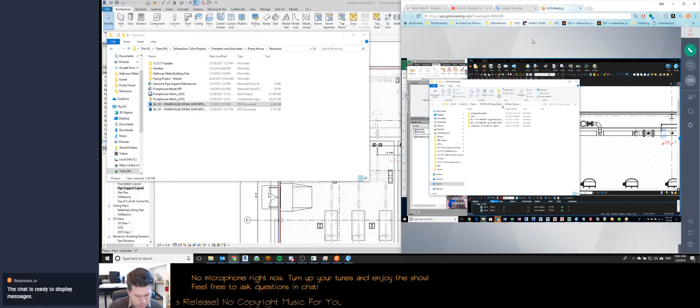But once I have them, I'm going to shoot them to you, and hopefully we can get the rest of the steel in there, support-wise, so we can really give a good idea of how tall all the concrete stanchions are, and finalize some of that. The guy just wants to know how much rebar he needs. I think what I gave him will be okay for the time being, but I'm sure they want as much data as they can get, just like anybody.

Yeah, and some of the heights as specified are off, so either the pipe support is wrong or our pipe height is wrong, or there's just a confusion between the structural and the mechanical engineer. So we'll have to walk through some of it. So yeah, that's what I figured we could do this morning. Before we get into it, Carl, did you get all the drawings I sent last week of the submitted for approval building? Yes, and we've gotten everything except for the main frame done. So we're expecting to have that done today, and then it'll be all off to Tanner.

Sweet. How did it look so far? Was it better? Much better. So obviously we still had some coordination comments, but I've never been happier to say that I was happy to have comments because they were actually good, if there's such a thing as good coordination comments.

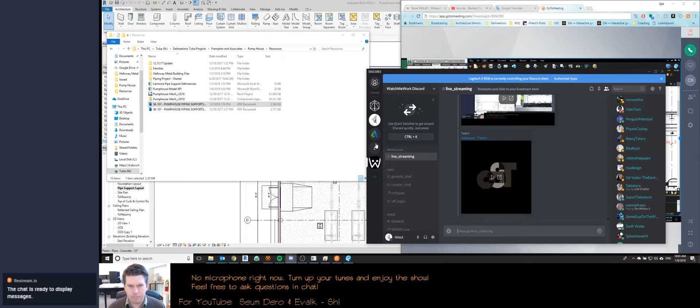All right, well, I guess we can start going through some of these board issues. I have the same drawing pulled up on my screen and Excel spreadsheet, so we can go through them. Excellent. Okay. Well, give me some screen right here. Yeah, do what you need to do with that thing.

Okay, so let's just kind of start at one. So we have supports have potential conflict with adjacent well and drain piping. Support footing continues beyond building foundation. And also, as we look at these, I'd like to review them in the model as well. Okay. We're looking at this guy here. 1-1. I think drain piping, just wherever we set that drain piping will be fine. Drain piping. Yeah, so I think that's good.

At first when I was making up these notes, you and I didn't really talk too much about the drawing. It was like, here it is, and I was looking at it, wondering what the issues actually are. It looked like some of the wells were a little close. And in this particular case, at first I didn't understand what the big blue boxes were, and then I actually used my brain for about 12 seconds and realized that those were the thickened concrete support underneath the foundation.

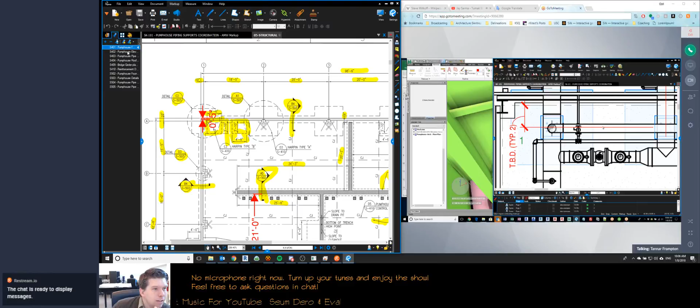So as far as that's the major issue with support, I guess 1 and 2, or both of these are 1. Yeah, these are typical, that they go beyond the building foundation. Right. So looking at the model here, this support is right underneath this T, and I think as long as we're just underneath the T, where we're not on a weld, we're good, right? I would agree. We probably have to be centered on that T in order for the support tube to make sense, and for the welds to have at least a little bit of clearance.

I still don't know how tall the shoes themselves are, still kind of waiting on those. Yeah. But all of that information is going to be subsequent to when we get the submittal data. Real quick, what about this whole tie rod? Is that something that you think... So that's part of the building structure. Are we looking at the model with the new building or no? No, not the update. Carl sent it about 30 seconds before the meeting started.

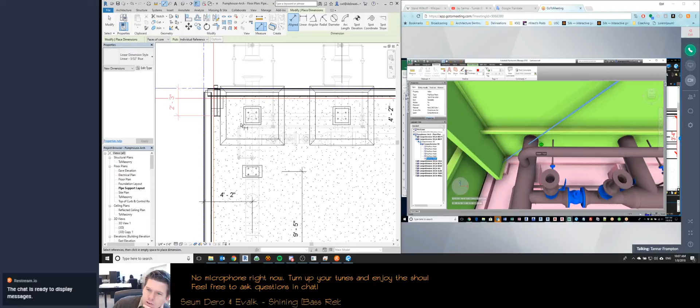Carl, did they include these? This wouldn't be Carl anyway, I don't think. This is the original building manufacturer, so I can't throw him under the bus on this. But yeah, this is the tie rod. Isn't it a tie rod? Is that what it's called, Carl? Yeah, diagonal bracing. It's probably going to be a solid 3/4 inch rod, and it did not change in the latest, so it's still in that same bay. That's what I was going to ask, if it had changed. Nope, sounds like it's still in the same location.

I don't know how far up the column they can raise that diagonal bracing in order to try to miss that pipe. I don't know if it has to be tied down at the base of the column or not. Okay. But that is still an issue with the new model.

So, obviously our options are: one option, from what sounds like Carl, is if this can be raised up on the beam, right, without affecting structural integrity; or relocating the pipe elevation to go down, because we're offsetting here anyway. I don't know if we need to maintain this elevation going out of the building. Or simply just pushing this over probably a good 12 inches, so it's not 18 or 24 inches. So those are kind of the three options that I'm thinking.

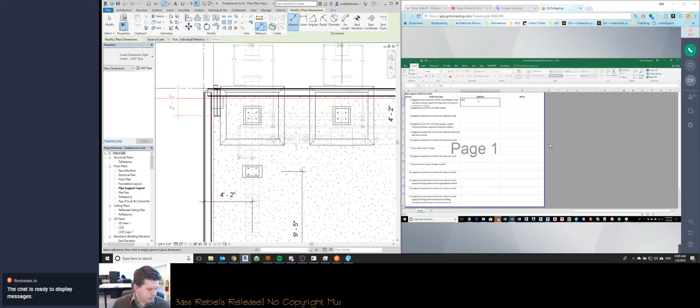So what do you think, Alex? You want to think about it and maybe follow up? Off the top of my head, what I'd like to do is get the new model in here, take a snapshot of this, send this over to Halloway and say, hey, in this area we're having this conflict directly with one of your turnbuckle, whatever they're called, your diagonal bracing, and see what they can come up with. If they can go, oh yeah, we can move that, or just get rid of it. I'd like them to build the building around the piping.

Yeah. First and foremost, this is a pump house. I'd like to mess with the piping layout as little as possible. So if we can get the new building in there that shows everything as they have specified it in the new set of drawings, we can get myself a screenshot, and I can get this over to Brandon. When I talked to Brandon on Thursday or Friday, he seemed perfectly fine with jumping into a meeting with us to go over some of these coordination issues, if there are issues like this.

If we only have this one between the piping and the building, I don't have a problem shooting an email, but what I don't want to do is stack up 15 emails in his inbox for similar issues. We could do some sort of RFI, or kind of what we're doing here, where we just walk through these and see what he can and can't do. But if we don't have too many of these occurrences, I don't have a problem. If you guys want to shoot me a screenshot of what's going on here, I'll get to Brandon and see what he can do. Like I said, I'd rather us get him to manipulate this cross brace or do something with it to get it out of the way.

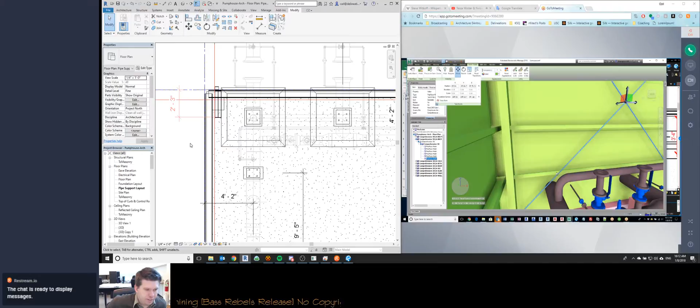Okay. And now that's not me redoing the angle, I'm just moving the whole thing up. So, yeah, you're right. It's probably going to be more like 10 inches or a foot, because if you look at the top, the top of that bracing needs to still be within the column. So that's going to lower that angle a little bit.

Carl, is there any reason why this diagonal bracing wasn't in the original set of drawings, the contract drawings? No, but the structural wouldn't have done any engineering for the building, so they wouldn't know where the building manufacturer would want to put that bracing. The bracing's gonna have to go in one of the end bays. So it was either this bay or the bay where the control room is, and that bay has those openings down there, so this was the clearer choice. I have a feeling they'll be able to raise those up, but I don't know what the limitation is.

So I will also say, Tanner, this model, the one that we're looking at, even though it's not updated to the latest drawings,

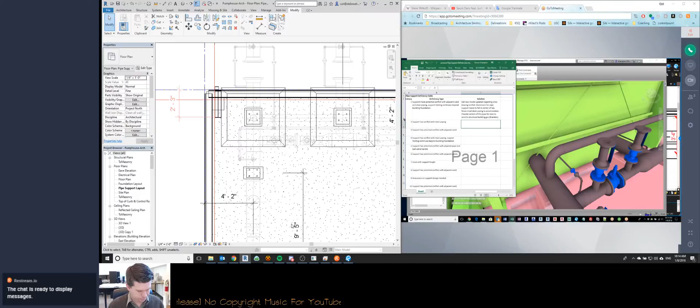How's that? And it sounds like, as far as the foundations are concerned, for these two, I'm looking at the piping, and I think in order to get this piece of pipe out of the way, it looks like we'd have to make some... We don't have a very long run between that T that the support sits under and the wall itself to make some sort of transition, at least a nice transition.

So if we lowered this whole leg of the pipe, we're affecting quite a bit of the pipe at that point. We're affecting not only this leg, but also this other leg. I mean, I guess you could do that, what you're showing there. Yeah. Yeah, you have a U further down. So further south, if you keep coming down that branch there, you've got another transition that you have to worry about. But it looks like you could push that in also. Yeah, you could squeeze that in.

We shortened it up right here. Go back to the area that we're looking at though. That I'm not too worried about. What I am worried about, that's getting a little tight. All those valves and everything. Yeah, I'm worried about access to all the valves. It doesn't look like it would be that big of a deal to squeeze it in a little bit to get it to fit. But let's go first with the first option of let's talk to Brandon and see what options we have on the building side. They may be able to do something to move that bracing to a different bay.

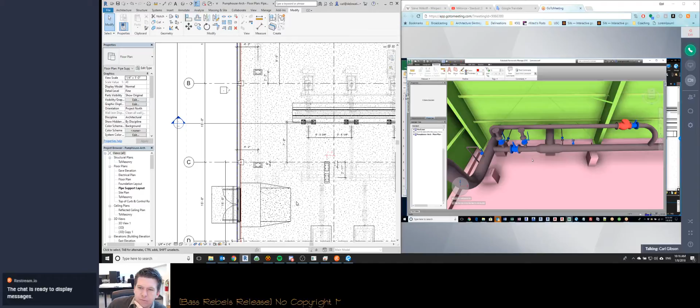Okay. So I think just letting them know, hey, just send them a picture, and I bet they'll find a good solution. Yeah, I'm going to send a screenshot and a section with dimensions to show where it's at. Okay. And Carl, well, you may not know the answer to this. I know you're still kind of modeling stuff. Do the main beams, columns in that building overhang? Are they going to overhang as much as we're seeing in this model? They still overhang. Some of them are a little bit smaller, but they do still overhang. And there's even a note in the drawings talking about them overhanging. So yeah, we're gonna have to look at that quite a bit to see where they're interfering once you've got all that sorted out.

Because Brandon said they could taper them, but then they had to do something with the upper roof columns that was going to interfere with the gantry system or something like that. Yeah, I didn't understand what the response was. It sounded like option A or B. But basically, it sounded like you have to have the same amount of cross area in the whole system to be as strong as they need it. So if you lessen the area at the bottom to fit on the column, if you taper the bottom, make it smaller, then up there at the knee, where the rafter and the column meet, that's going to get beefier.

And so what's going to happen is that rafter is probably going to drop down a little bit to get deeper from the roof down below. And that will affect how much clearance the gantry has on that side for the support beam. We don't have the gantry in here, do we? It doesn't look like it's in this model, but did you turn off the structure for the architectural? I think you turned off the columns from the architectural, which has the support beams in there. So I don't know that I'd worry about it. Well, let's not get off of pipe supports this early.

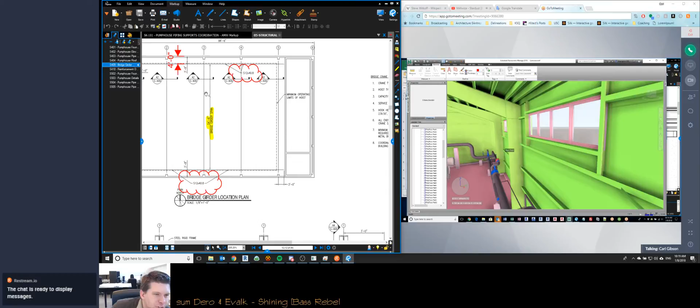I meant to go back and look at the elevations that they gave us for the bridge crane, and I don't think Structure ever gave us heights for those. So the height of that bridge crane is being set by the building manufacturer anyway. Gotcha. I'm looking to verify that, but I'll let you know if I find anything. Might be an architectural. Well, maybe that's something we go back to AV&A and say, hey, what's the height of this bridge crane supposed to be? Yeah, I'm looking to see, maybe I missed something.

Okay. Hey, so Tanner, on number one, can you tell me dimensionally how much those support foundations are kind of overhanging the building foundations? Make sense what I'm asking? You're talking about the foundations. Yeah, so you're talking about like this overhang there? Yeah, I guess how extensive that overhang is, because I'm gonna generate an RFI for today.

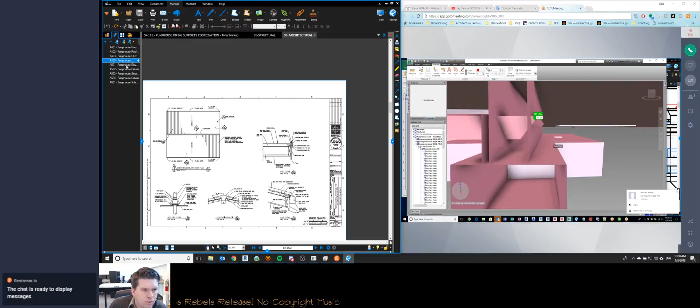I think there's these two, and there's 2 or 3 other supports that are overhanging the main foundation by some way, shape, or form, and I'd like to be able to tell them how much that is. I'd get at 2 inches. Is that right, Carl? Yeah, I think the bigger concern here is if that foundation is somehow being tied in, so I would actually say it's 10 inches, because you want to go to the inside face of that foundation.

You don't want that rebar. Yeah, you don't want the rebar for this foundation being mixed in with the building rebar. Those need to be 2 separate structures. I gotcha. So 10, okay. So anything past the inside edge is overhang. Yes, and I say that it needs to be separate structures in my non-engineering professional opinion. I'm going to concur with Carl's non-engineering professional opinion.

They're going to want to keep all the steel and all that stuff tied into the main foundation, and they're not going to want any overhang. A foundation with nothing going beyond the boundaries, and then they drop the building on it. Alex, are you with the company that's going to be subcontracting the steel men and the concrete pourers? Yeah. Okay, so I guarantee you, if you talk to your subcontractors, they're going to look at this and say, we don't want that separate.

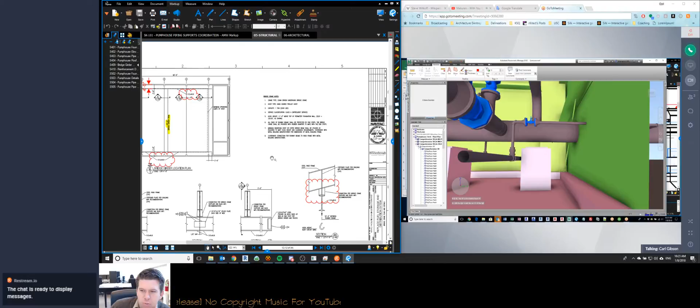And what I wasn't sure about is, sometimes with these pre-engineered buildings, they'll do the perimeter wall and the strip footing all the way around the exterior with a column base, and leave the interior completely dirt. Then they'll come back and pour the slab later with the building already erected. So I wasn't sure if that was going to be one of those processes. That has not been discussed with me. I don't think that's how they're doing it.

I think they're going to lay down the whole concrete foundation for this building, and then build a building on top. They're going to dig and cage everything, and then come back and pour it, basically? Correct. They're going to form everything, get all the wood in place, and then do it all at one time in multiple pours. They're going to tie in all the steel all at once. That's what's been communicated to me, that they're going to do this all in one big exercise.

Yeah, and just to update you guys, I'm looking through the architectural and structural, and there's no mention of any elevations except for the hook height, talking about the bridge crane. So there's nothing in the architectural or structural that is setting the height for those supports. Okay. What sheet are you on? Yes.

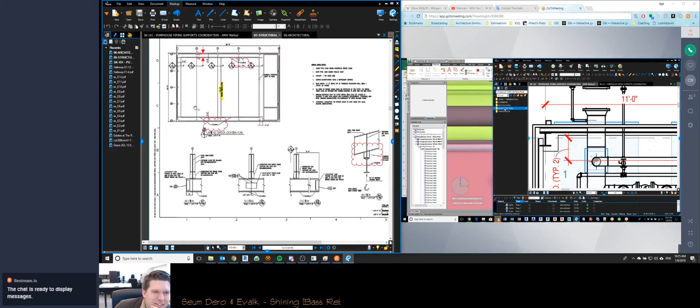Oh, what sheet were you on? I'm on all the sheets. I mean, do you want me to tell you which sheet doesn't have a height for the crane, or just the ones that I'm looking at? Oh, well, the way you said something. Height. Yeah, there isn't one, so I don't know which sheet you want me to give you. Oh, I thought you said there was one. No. Oh, I'm sorry.

For the hook height, that's S409. S or F? S as in structural. Oh, okay, cool. Or Sierra if you're in the military.

54.6. Oh wait, no, that's between. It says 239 minimum, and I'm looking again in the architectural. There is one mention in the architectural that the hook height is 11 foot 6 inches above the top of the foundation. I'm looking for that number right now because I just saw it. Above perimeter foundation wall. Okay, there it is. 11.6. Yep.

Tanner, have you modeled the gantry crane in here? I remember it kind of was, wasn't it? We've got the crane rails, but just so you know, Tanner, that third purlin up is 11'6". There you go. That's kind of a low crane. Well, that's a good thing for us. Well, that's the minimum height too, so it should be able to be raised up above that. I mean, if we went with

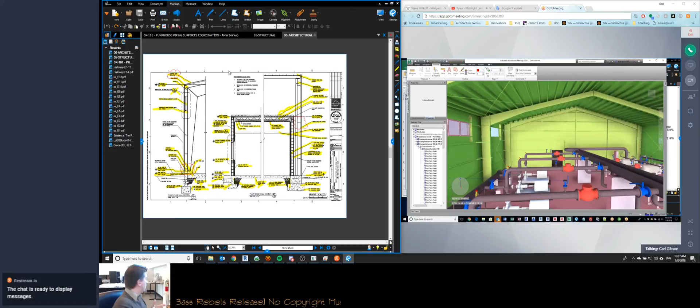Courtney, you're welcome to come listen in on this meeting if you want to kind of see how it goes.

So, Carl, correct me if I'm wrong, but Holloway is worried about the actual gantry rail with the roof rafter. Right. What they're concerned about is if that rafter gets thicker, it's going to lower the supports. I was looking here. They have some specifications in Holloway's documents on the cover sheets on the crane. Sorry, it is on the cover sheet. On the cover sheet of the Holloway E sheets, they have some information on a crane, but nothing indicating sizes or anything like that.

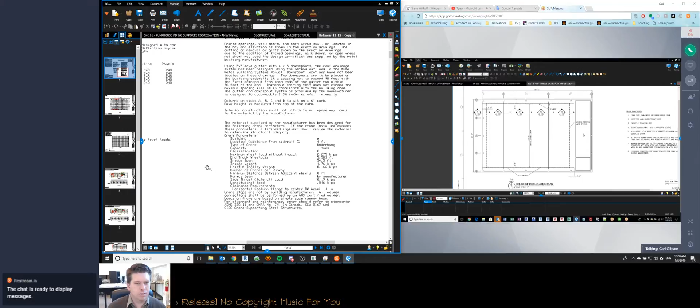So basically, what Holloway is concerned about is if that rafter gets deeper, the supports get lower. And I think you're going to have to start getting some model numbers for the crane to figure out how that works with the hook height. Does that make sense? I can do that. Put that on my list. Basically, you're gonna want a number from the crane manufacturer on the minimum distance between the bottom of the hook and the supports that the crane sits on, because there are no details on how that really sits in any of the documents. Okay.

Is it smart for us to model the kind of crane system in here? Yeah. Okay, then I need to find a cut sheet on this crane that we're gonna throw in here, don't I? I think Tanner just wants to model something. No, so there's two parts to it, Alex. There's modeling the crane itself, and then there's modeling an operation zone. Those two things are actually very important.

If we're going to the extent that we're going, to leave that out is pretty critical in my book. But at the same time, it is something that is overhead, and I understand that once you get up above the absolute highest, tallest piece of the piping system, then you're clear, but still, you never know until you model it in. You know what I mean? Yep. I'll get whatever.

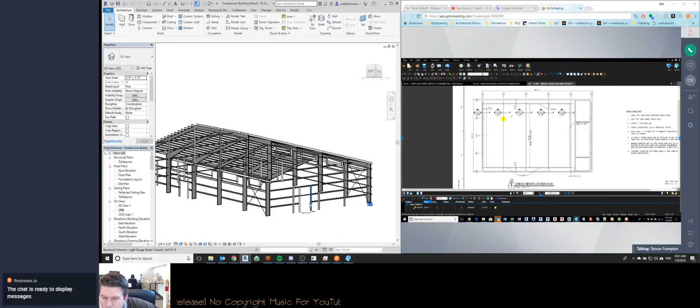Because think of this: when you model in the operational path of travel and things like that, if you reference the PDF, here's the girders, right? You may find a spot where something the crane needs to pick up would be dead center, say right here, and the crane would be like 6 inches or a foot out of range to come down and pick something up. I'm just throwing out something generally. You can really plan ahead to make sure that every component is truly in place at the path of the crane itself, and nothing is missed.

Okay. Well, then let me start. I don't even know who's supplying that thing, or if we are even supplying it. I'll have to do some digging on that. This could be one of those things the government likes to do a lot, where they just want us to put in the infrastructure, and then they have some maintenance supplier that supplies the crane.

Yep, if that makes sense to you guys. Sometimes they just want us to, like, on a lot of the tank work we do, if we're repairing a tank, they want us to go in there, repair the tank, and add a couple of nozzles. And they'll have their maintenance people come in and actually put the purchased equipment on top of these nozzles.

Yeah, no, I know exactly what you mean. My guess is we are supplying this crane, but off the top of my head, I have no idea who's been subcontracted to supply the crane, or what the crane is, or anything like that. So let me do some digging on that. Okay, cool.

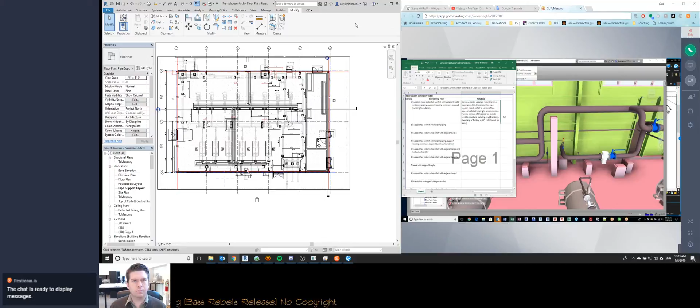Because, like I said, I'm going to craft an RFI up today that identifies all these supports that overhang the foundation, but I'd like to have dimensions in there so I can call it out, give an attachment that says, hey, this is an issue, what do you guys want us to do? Okay, got it. Sweet.

So move on to number two. In the middle of the building here, conflict with drain piping. Alex, kind of like what you mentioned, you were just going off the plan view. This may be a false positive. So what is the issue with two? We were looking at possible drain piping, but this is a double stack pipe, so it's a false positive there. There's no drain piping issue that I can see. There's just the little bypass here.

It doesn't look to me like we'll have any weld clearance issues or anything like that either. Right, I think we're good. So I think we can mark off two. And it looks like we have enough room laterally where we could move it if we wanted to. Can you go back to the 3D real quick? Is that the right location? Oh, that's under. Okay, now I follow.

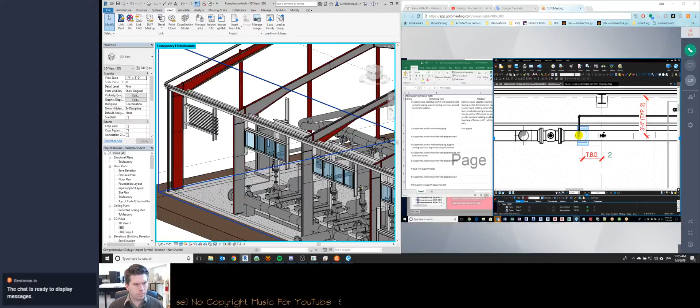Yeah, the initial plan view you sent is a little deceiving because you can't see the bottom. So I think we're fine on that regardless. We can move it, in that view, to the left if we need to, in order to get away from that reducer. Right.

Okay, three. To be determined, and this is building. Let's just continue down the line. We're looking at 3 now. So what's the issue with 3? Are we close to a weld, or is this another area where there's a pipe underneath here that I can't see? Let me look at this for a second. So small. Okay. Is 3 the big tall one? Yeah.

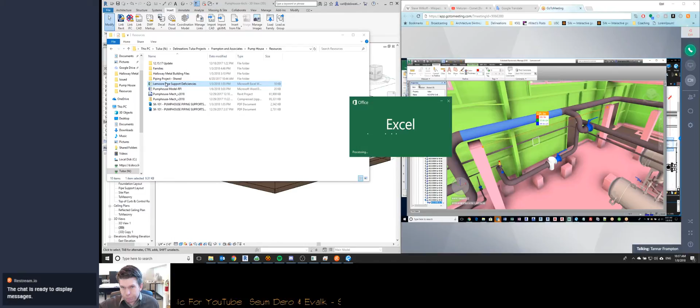Now, let me ask this question. 22-foot span. Is that too long of a span by chance? What size is that pipe? It doesn't tell me. And what's the span? You say it's 22 feet, 5 inches? It's 10 inch, we're assuming?

10 inch pipe, yeah. So, just for your edification, Schedule 40, which I think all this piping is, just plain Jane steel pipe. You start to worry at a 40-foot span for 10-inch pipe. We're good. I've got a little table right here that I use, kind of an offhand table, and I'm seeing it go up to 40 feet if you wanted to.

Now, the government would never let a span that big happen. But I think at 20 feet you're fine. Is that what your concern was? No, that was kind of sidebar, but I think we're good now that we looked at it. So Tanner, the way I was reading that, if you look back to the left there, I think you'll see that it's close to a weld point.

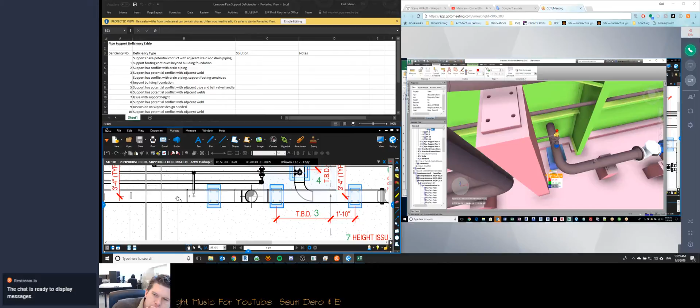How much space do we have between that support and whatever's down at the bottom there? One here. Is there anything? Is there any reason why we couldn't move it to the right a little bit? Maybe a couple inches. If we just go delta, we're looking at 6 inches. Yeah, but I don't see any reason why we couldn't move it if we wanted to.

Couldn't move it maybe an inch or two to the, I guess, to the right would give it a little bit more. I think we're fine with that one. Let's leave as is. Hey Tanner. Yeah. Look at that just real quick.

I'm looking at the foundation situation there for the big square one. Oh yeah, I see. Let me just look at that real quick. Oh yeah, does that interfere with this big tall one? Well, that number, the one that's number 4, is another one that I think is sticking outside of the foundation there. Correct. And I guess 4, that's what I'm looking at real quick. I think that is a PS3. That's pipe support L.

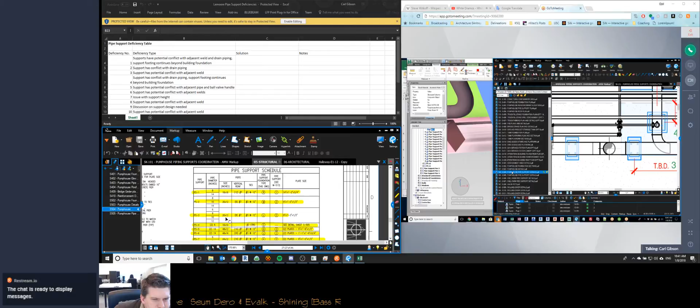And so that just has some hooks going into the slab. But it doesn't indicate how far out those hooks go. So if you look at S504, it's probably mentioned somewhere, but I don't see it. Plate size, ties, vertical reinforcements. Type support foundation type. So drawing L, type L.

So you see the rebar hooks going out there. So I don't know what that clearance is. And then if you go to the next sheet, S505, you'll see what the rebar looks like for that guy. And you'll see that we might actually have a problem currently with the rebar. It's down underneath. It's type R. You scroll down some. Oh, type R, here we go. Yep. So we might have a rebar collision there between those two.

I'm trying to visualize how that would look. So if you go back to Navis, and you imagine the cage coming up from that foundation. Go look at it from the south. Does that sit over? It does.

Okay. You might want to put a note if you go back to your PDF or your plan view where Alex put his markups on it. You see where that sits inside of the foundation area. You see how the tall support sits inside the area of the foundation. Yeah. You might have a collision with some rebar right there.

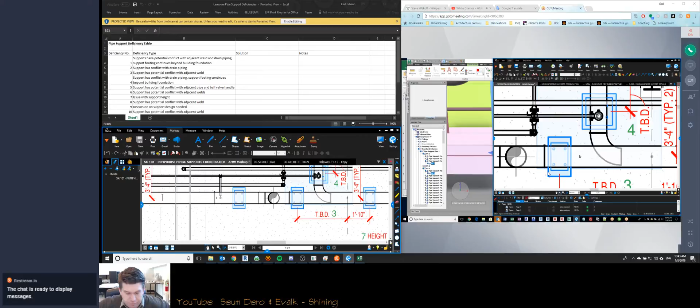My guess is they're going to rework this thing too. Yeah, probably. And Alex, you can just let us know if it's a field work thing where they just work around it. I don't know. Again, I would think that they're just going to jam all that steel in there. Yeah, probably. If steel's kind of touching steel, it's all going to be encased in concrete. None of this is going to ever go anywhere.

Right. So I don't know what the limitations are for what they can move and what they have to have exactly where it's shown in the structural document. So this is just me looking at this saying, if it's sitting on top of another foundation, they might have to work around some rebar there. And that maybe is just a note we put in there. When we were talking about moving it closer, I was thinking that might complicate things a little bit more. But again, it's probably something that somebody with experience in the field can do no problem.

Yeah, I don't think the concrete people are going to have any problem working. I'm sure there's got to be a couple more conflicts like this too, where there might be one support sitting on another support's footing. I'm assuming this is probably not the only case of this. We just highlighted this case because this foundation in particular is overhanging the overall foundation. I just took a quick glance around. I think this is the only place where one pipe support's sitting over the foundation of another pipe support. Oh, really? Yeah. Okay.

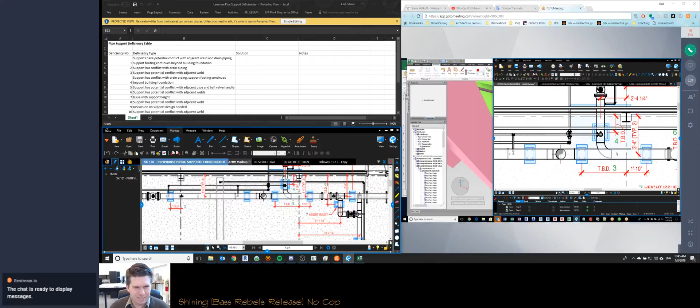Yeah. Okay. Well, my guess is what I can do is I can call that out. What I'll first do is I'll first talk to ABNA and go, hey, your foundation's overhanging, and they'll go, oh, then chop this edge off a little bit, right, thicken it here, or do whatever. And then at that point, we'll send those drawings back to our concrete guy and go, hey, are you guys going to have any problems with the rebar meshing up in these areas? We'll highlight the area, see if they're going to have some issues, and go from there. Right.

Let me jump in real quick. I got about 15 minutes to go before I got to move on to another meeting, so I just want to consider the time there. Jesus Christ, man. You're the one who booked this meeting, too. I mean, there's so many things to consider. I get it, trust me.

Okay, so for four, call out the same dimensions. That number 4 is overhanging, whatever it is. I guess it's probably around the same amount. Yeah, it's the same foundation. It's hanging the same amount there. Yeah, it's going to be the exact same. Call that out on the little sheet, otherwise I'll forget. Or it's about a foot or something. Yeah, 10, so 10-inch overhang. Okay.

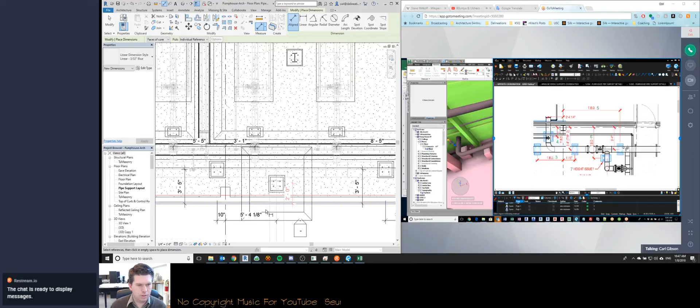So 5. That's door. So this is very close to the wall. So number 5 is what we're looking at. Can we move that to the left? Yeah, that is fine, correct? I would think so. I don't see any reason why we can't move that over to the left a couple of inches to give it some breathing room. That's what I would do. Okay. Good there.

So this is one area where I think there was either some miscommunication between the original design team or our piping is wrong or height is wrong. So which issue are we looking at? It's not noted. It's just something that I saw. Where is that, Carl, which sheet? In plan, where is that? It is this one right here. Okay. Hold on. Go back to the model before we jump to that one.

Look at 7. Because what did we just do? 5, and now we're looking at 6. I guess both 6 and 7 apply. Oh, yeah. 7 is a height issue. I may have tagged that wrong. I think you tagged it wrong, or is it? No. We've got two supports that aren't supporting anything currently. Right. It's both of them. I'm sorry. Yeah, I didn't notice here.

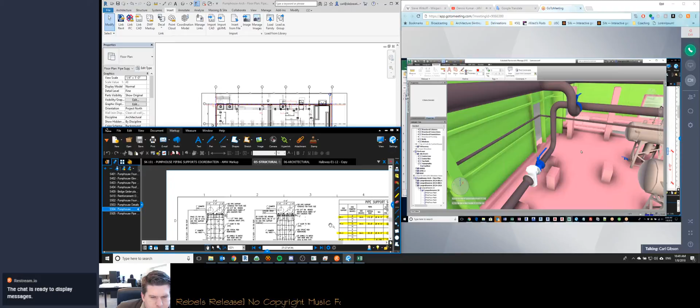I'm looking real quick to see where I got the heights from. And right now it's looking like that might have been one that I did not have a pipe elevation for, so I did not have anything to set the height for, because in the structural documents it calls out the height as pipe centerline elevation to finished floor elevation. So I didn't have anything to actually set that elevation to. This might be a simple, now that the piping is X tall, we'll just adjust it up. Absolutely. So this is 504. I don't have an RFI on that page, but

Yeah, because those things are just sitting out in space right now and not doing anything. Right. If it's an issue where we got to give you the height, then we can give you that height. Yeah, I think, Tanner, there was a lot of that in this entire set where I just didn't have elevations. I'm looking through the plumbing real quick to see. Keep going. I'll let you know if I find something. Okay, so these 2 are kind of up in the air. Yeah, they're not doing anything. They're just sitting out in space.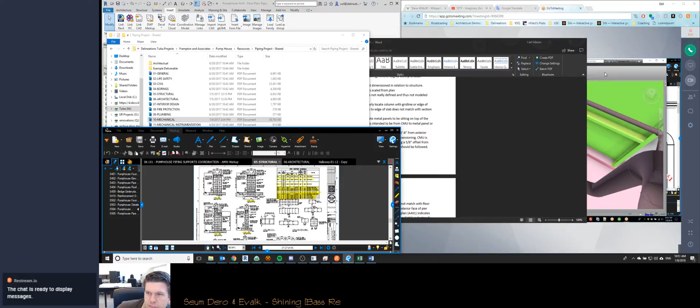Oh yeah, that could be a pain in the ass. I'm trying to remember what way those valve handles... Well, you can pivot. Yeah, you can adjust the... but it's just common where if the handle is parallel with the pipe, then it's open. Yeah. Right. Now what I don't know is whether that thing swings, I guess in that perspective, if it's going to swing into the support or if you're going to pull it towards yourself, like towards the door.

Did you see anything on the submittal that says what way these things go, clockwise or counterclockwise? No. I guess I could ask. Yeah, and I know you don't want to do it the other way because you've got the strainer. Yeah, we're gonna have to leave the orientation of these two the same. If that support is meant to support that big tall piece, we probably can't do anything with the support location. We'll probably have to do something with the valve location, or we'll just have to have them manipulate the handle.

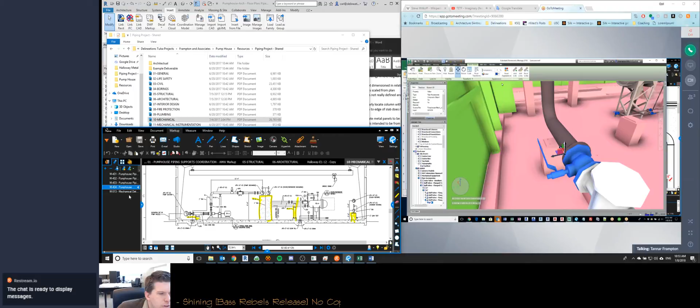You can turn the valves too. All these valves, there's nothing wrong with doing that. Yeah, so we could also do that. That might be the way to go. As long as we can do that, then I'm comfortable with it. Ball valves and double block and bleed, all the valves you work with, they don't have to be straight up and down. Okay, great. Then I think we're good. We're okay. I think 6 is this way. Good, okay.

So you're gonna communicate this data back to Carl, I assume? Yes. Okay. You may just want to mark that for your other one. Call it like 7A or something. I don't know. Yeah, so it's difficult too, so good. Alright.

Just so that you guys know, it doesn't look like there's anything in the mechanical. I see some heights, but I don't see anything that indicates really what the height of those specific pipes are. I'm guessing though, since you guys are setting the heights of these based on the routing of the piping, that you can just give me the heights that you want it to be set at. Yep. I concur.

Okay, now real quick on 8. The orientation of this, I think, needs to be rotated 90 degrees, correct? Oh, is that what we were concerned with on this one? Well, it was kind of close to the weld, but also now that I'm looking at it, the orientation I think is wrong. Carl probably did it right per contract document, but no, it actually looks like that one's rotated incorrectly. It should be rotated 90 degrees there. That's right up against the control. Yeah, that should be rotated 90 degrees.

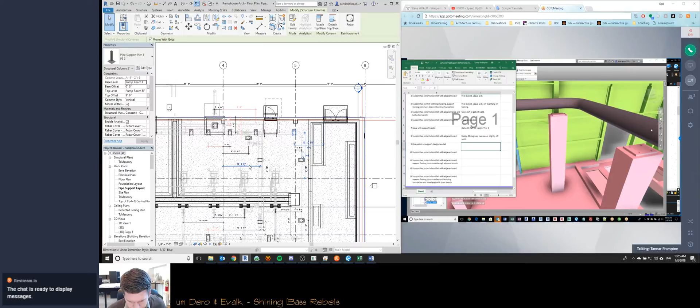What is 9? Alright, oh yeah, it's these metal supports. So what's going on with these? I've got some direct input on these right now. You helped me with this last week, Tanner. We sent pipes for the filter separators and that sort of thing directly to the guys who are building these supports. So once I have data on those supports, I'll send that to you and we can make sure it jives. What I do know, and it doesn't look like you put it into this model yet, is we want to put 1-inch grout underneath all the filter separator legs. Right, yeah, we talked about it, I've got it noted, but I haven't pumped everything up yet.

Yep. We'll get an actual submittal on these metal supports from the company called Nova that's supplying the stuff to us. So they're gonna design them per the drawings, fabricate them, and send us shop drawings, and then we can put the actual steel into the model. Okay. Yeah. Any equipment, like the filtration, any of that stuff needs 1 inch of grout underneath the feet. Okay.

Alright, so moving on to 10. So this is where we have the weld issue. Yeah, so we're putting it right on a weld. I can move it. That's right. Yeah, so we're good to move it. Okay. I don't see any issues with moving that over to the right.

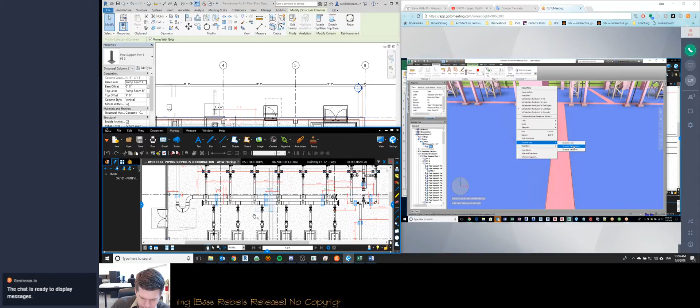So let's look at 11, because now we're getting under footing, and we're getting close to... Yeah, 11, it looks like we've got a foundation drain issue. Are we able to see that in the model, down there? Oh, yes. I specifically modeled it so you could see that. Okay, yeah. So what am I looking at? Does this look good? So how does it look from a section view? It's about a 2-inch intrusion of the top of the foundation into the trench drain.

Okay, so I'm going to address this in an RFI to AV&A. Can you guys send me a section view of that showing our issue? Something like this, maybe a tad more clear that says, hey, this is the issue. Yeah, I can create that. Provide me with some sort of graphic, and I'm gonna get these in to AV&A. So I'm going to leave this as outstanding. We'll have to come back and look at it.

But as far as where the weld goes, it's close, but I think we're good. If we can move it over maybe 2 inches or so, that would be good. But I don't know how much room we have for this trench drain. Yeah, we'll have to see what they come back with as a solution. Okay, it's gonna remain outstanding. I'm good with that. Tanner, I just sent you a section cut from the Revit model in chat in the GoToMeeting. Okay. Now we're on 12. Oh, that's perfect.

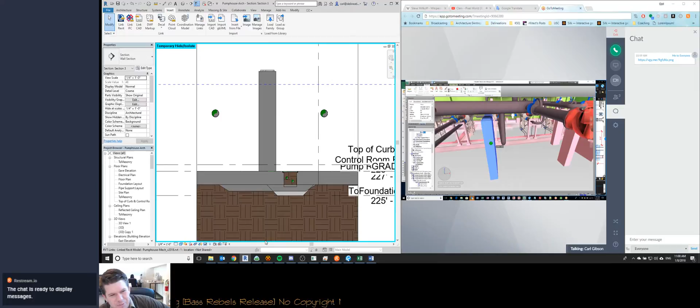Good. I put a square around where it intrudes into the drain, but I also forgot that the bigger issue is that the foundation actually interferes with the foundation of the trench drain itself, which you can see from that section cut. But again, that might be one of those things where the steelmen just go in there and lay all the rebar next to each other and on top of each other. Yep.

For 12, we have room to move it to the left, and I do want to move it to the left a little bit. So let's do that. That's what I figured was wrong with 12. And then 13, I think, is your major overhang. I think it's got both a weld issue and an overhang issue.

Yes. So just for my edification, I'm picturing these things being built. We've got these supports, which will be in place before the pipes, and they'll be putting these together piece by piece on top of the supports. So the issue is that when they weld these into the supports, there's not going to be enough clearance between the support and the weld points? Correct. They're going to have to do non-destructive examination on the welds once they're completed, and you can't have welds crossing over each other to perform that analysis.

It's typically a good rule of thumb in engineering to leave spacing between welds. The government gets all bent out of shape about the heat affected zone, where you've heated up a certain area multiple times, and it can cause failure. I've actually done research on that and proven it false numerous times, but there's certain guidance in their documentation that they want some clearance between the welds. Sometimes you can't help it, but in tank construction you really need to be aware of your weld spacing.

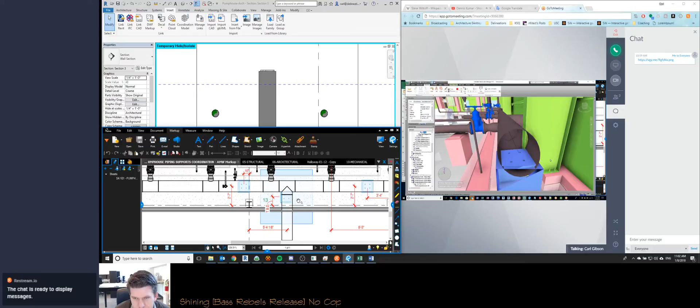Yeah. API, the American Petroleum Institute, has lots of background information on keeping weld spacing in line. So it's not so much that they can't put it together. It's more about the investigation afterwards to make sure the welds are done correctly. Correct, and it just looks bad. The other thing is if you have a weld going over a weld and you have a failure in that area, it's hard to pinpoint which one it is and say, hey, this weld is leaking. You won't know.

You're not able to do a full examination of that weld and say, oh yeah, we've got a pinhole leak right at the weld-to-weld joint, if you would. You want to keep all your welds pretty clean. You can visually inspect them, and radiographically or some form of NDE inspect them. So that's why we like to keep. Plus, it makes it a nightmare for the field guys to be welding over things and that sort of stuff. Yeah. Okay. Good. Thank you.

So I'm basically out of time, but for 13, I think we're going to have to table this one because there's just more issue with conflict of the building and all that anyway. So can we just table that one? That whole pipeline right there, by the way, would you consider that a manifold right there? Yes. Okay. So that whole manifold right there has got column collisions going on with the building manufacturers.

Columns. Are we gonna continue to have column collision issues with the new building model? Yes, unfortunately. Okay. I'd like to see those once we've got the new building in there. Brandon made it sound like a lot of these issues were going to go away because they were using smaller columns, but, a lot of them did, to be really honest, but we still have some issues. Okay. So it sounds like my charge is I've got to start putting together some RFIs for some of these.

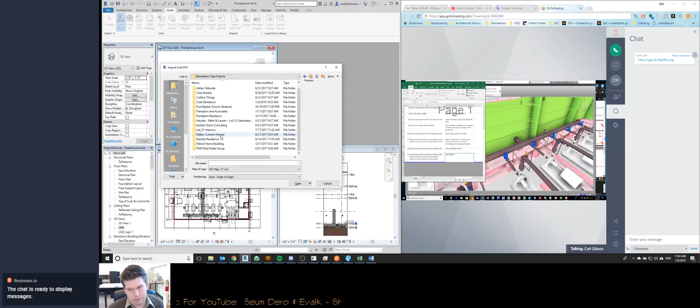Tanner, can you go ahead and, for that Pier 13, tell me how much it's hanging over? I know we've got more than one collision issue. Well, yeah. Because I'd like to wrap the supports that are overflowing the original foundation into one RFI, and I'll probably submit the drain trench RFI as something separate. He's going to have to get the new columns in there to get that, and we don't have the new main structure in the model yet. So we'll get that to him as soon as possible.

Okay, that sounds good. All right, it sounds like we're good. I'll let Tanner go. I know he's in a rush. Yeah, just let me get done with what I've got to do, and then I'm gonna send out all this stuff. Yeah, we'll definitely keep in contact with all this. Number 13, I think, is the main one. Yeah, I think that's the most difficult one for sure. So I'll get going on my side for RFIs. If you guys want to send me some screenshots, I can get some dialogue going with Brandon with Holloway as well. All right, sounds good.

And Alex, anytime you want to set up a meeting to do this with Brandon, regardless if Carl can be in or not, I'm always okay with that, and driving the model and all that stuff. Yeah, I just gotta put that time in.

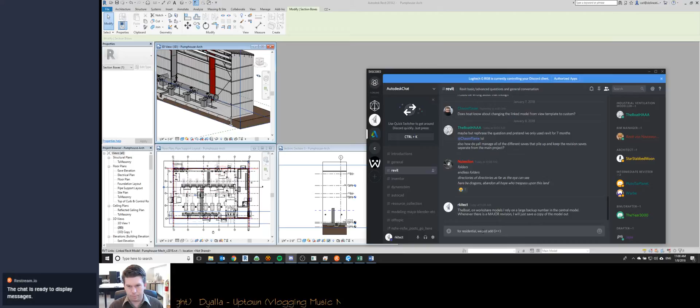I like the other playlist better. I think I'm going to go back to that. Quick break. Be right back. Alright.

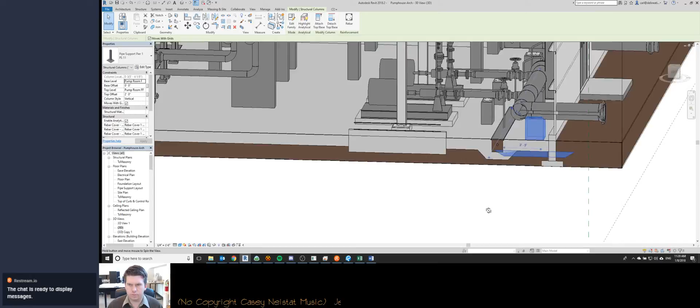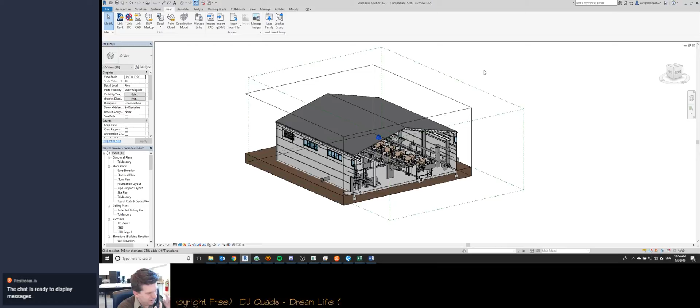You know, so I don't think we have too many issues with ArchiCAD as a tool. It's going to be more of the coordination flow and things like that. So I think we're just going to have to see how much we can cram into a 30-day trial and get a lot of those questions put down on paper and figure out what is going to work for us. Right. Yeah. Cool.

Right. I think, and I appreciate you being upfront with me about that. And I'll just tell you, Sean, I think our firm philosophy is that whatever software we use is just a tool. So if there's shortcomings for one tool on something that we need to do, you know, if you're familiar with Revit, you know that there's a workaround for workarounds. And that's going to be the same for any software. So I think that the issue isn't, are we gonna trip over our feet not being able to do something the same way we did it when we draw with a piece of paper and a pen.

The issue is really going to be, you know, I'm actually looking at a Revit model right now where I'm not really sure how that would work if everybody wasn't in Revit. Does that make sense? And one of the things that we want to make sure we don't shoot ourselves in the foot with is, okay, we're going to use ArchiCAD for residential and Revit for commercial, and then all of a sudden we have two specialties in the firm. We have people who are ArchiCAD experts and people who are Revit experts, and one can't work on the other project. Does that make sense?

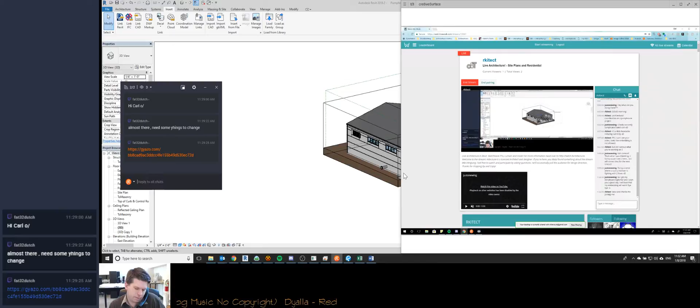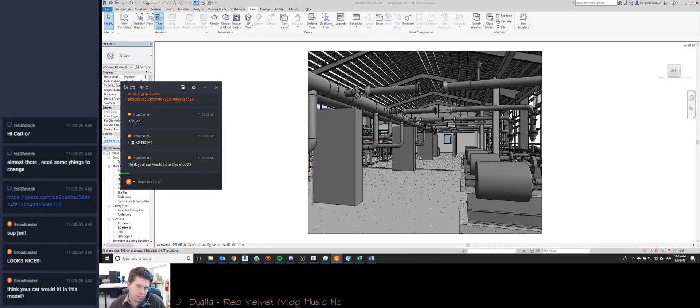Excellent. So the other question, if you've got a second, is my plan was to basically take a small house project or something, small commercial project that I've got, and try to model and document it into ArchiCAD. Aside from that, what are some suggestions that you have in terms of getting the most out of our 30-day trial? Right. Right. Right. Right. Excellent. Right. That'd be great.

So we have two offices. We have one in Tulsa, one in Marble Falls, and I think there's about 15 people in the office in Marble Falls. Not all of them are drafters or production people, and then we have 3 here in the office. 2 of us are production people. So, you know, I guess you're looking at about 15, 18 people. So I think we hold about a dozen Revit licenses right now.

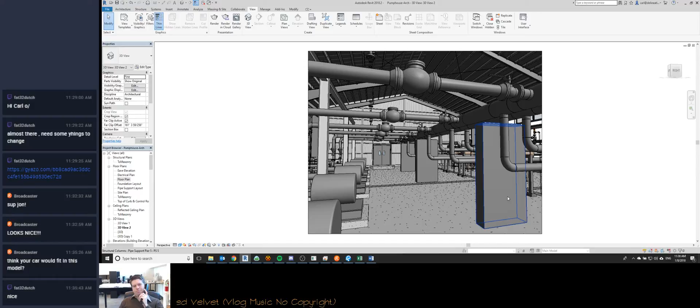And wait, we have to mail them to them? Oh yeah. Well, I think it's more portable too, right? You just take it with you and you install, and you don't have to worry about license transfer or anything like that.

Yeah. Oh yeah. Right. Yep. Yeah. Yeah.

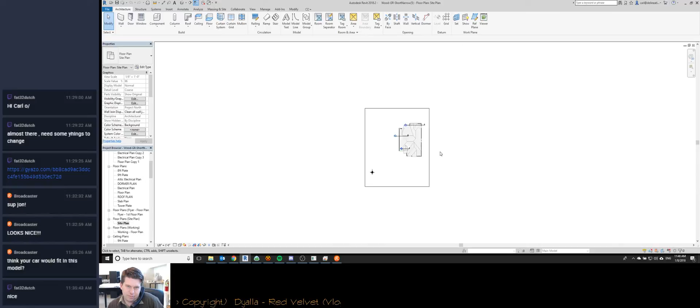Uh-huh. Yep. Yeah, yeah. Yep. Yeah. Yeah. Yeah. Oh, okay. Gotcha.

Well, nice, but it's only nice because it's the way that the workflow is meant to go. So if the workflow is meant to work a different way in ArchiCAD, then I'm sure that that workflow probably is meant to be intuitive and work nice as well. So, but we'll look at all those things and see kind of how that plays out.

Things like that I don't see being as big of an issue as things like being able to completely coordinate a project through the use of Navisworks, or bring another model in through IFC to visually coordinate those tough spots. Yeah. Right. Yeah. Yeah.

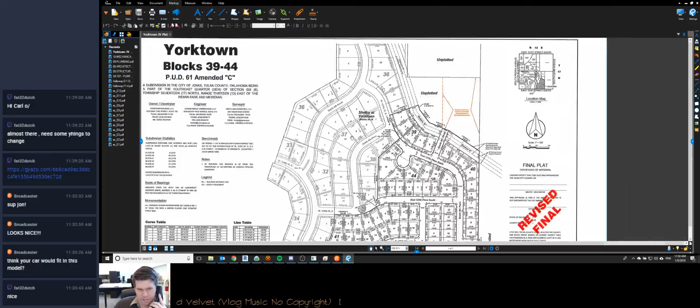Well, even if you did it all within like ArchiCAD, the way I see it is that 3D coordination is like a goalkeeper, right? They're not there to save everything that dribbles in. They're there to save the things that last defender can't save. So 95% of the coordination that we do inside of BIM workflow can be done with 2D details. It's that last 5% that buys the contractor their yacht that you want to avoid.

So if those are the things that we can still continue providing, then it's definitely got a good shot at sticking with us in terms of being able to use it as a tool.

So I've been using a lot of Lumion, which just takes Collada files, and I don't know what ArchiCAD can export to, but I'm sure there's a Collada translator in there somewhere. Yeah, I recall seeing that. But we actually also have some very talented Photoshop renderers in our firm. So we have some people who just straight up exported a 3D file and then put some lighting and materials on there. And yeah, I don't know if you're looking at the Delineations Tulsa site or the main Delineation site. Yeah, so there's a good mixture of media on there.

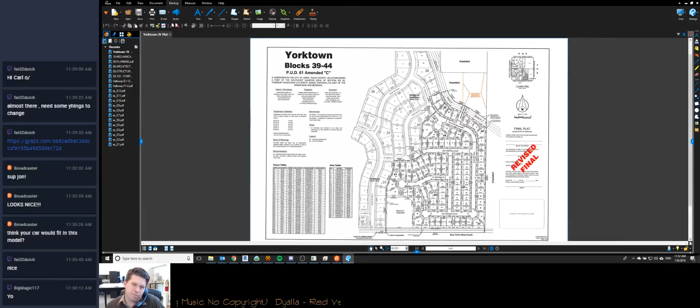There is, and the website's being developed. Since we're a new office, we don't have any finished projects, so it's hard. We kind of use both as advertising right now. We say we've got our site, our site has our contact information on it, and then we also point people to the portfolio on the Delineation site because we're all the same mindset, same design style, same quality product, but it's hard to show people pictures of renderings when they want an actual house.

So, oh, okay. Oh yeah, you guys going to the IBS? Okay. Yeah, and I actually need to check and see if my business partner, he usually goes to that show. I think it's usually in Las Vegas, right? Well, I think it used to be in Orlando, and then they moved it to Las Vegas, and I think this is the first year they're moving it back to Orlando, or something like that. And I can't remember if he said he was going or not this year. That's right, CES. Yeah. Yeah, my news feed's going to be exploding this week.

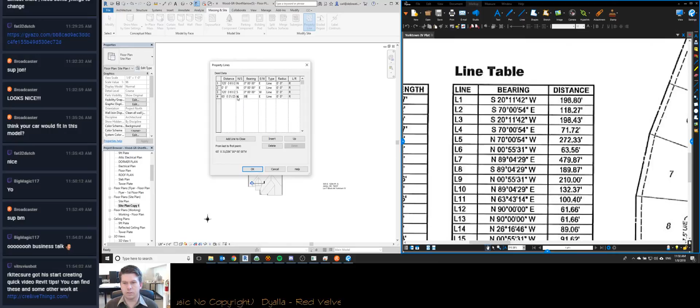This is going to be 65.01. North 89, 04, 29 east. There's no indication what this line is right here. But since these are the same and these are the same, I'm going to use geometry to say that it's the same as this.

L7, 479.87, north 89 04 29.

My other project? I know not which one you talk of. So I'm not sure. Lots of projects going on. One where someone mismeasured the roof. Talking about the pump house, the pre-engineered metal building. Well, we got new drawings, so it is much better so far. Wow, this one is nice and simple. So I remodeled it, and we have a pretty good set of drawings now, with just a few issues, not as many as we had.

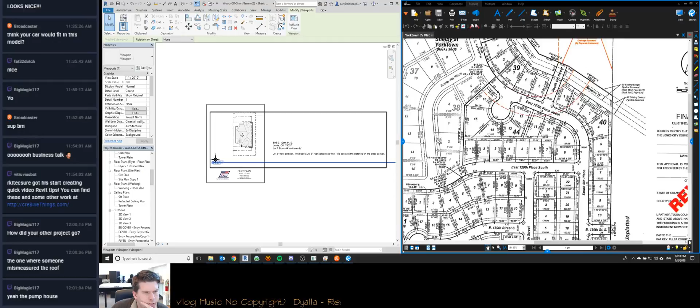It is a shared parameter. All right. Shared parameters, PHP shared parameters, plot information. Not sure why. Huh.

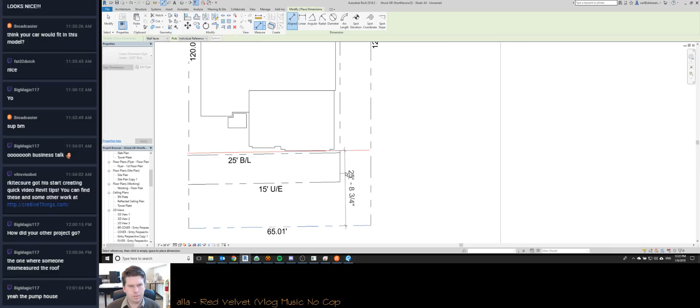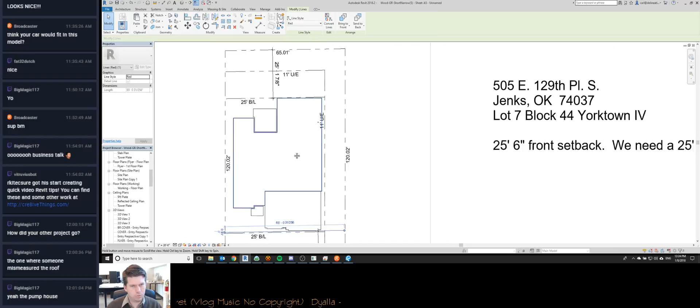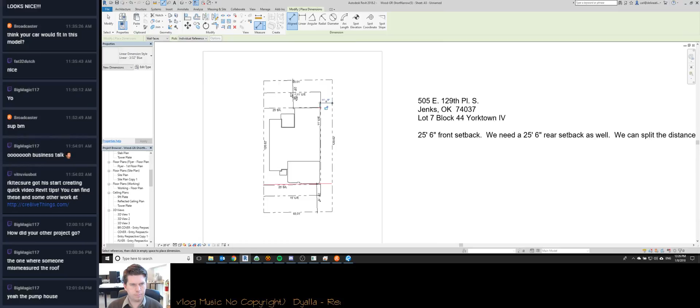I'm not really sure. I think this utility easement, pretty sure we cannot build in it. Phone save. Why is it taking so long? This doesn't make sense. That doesn't make any sense. Where did my freaking...

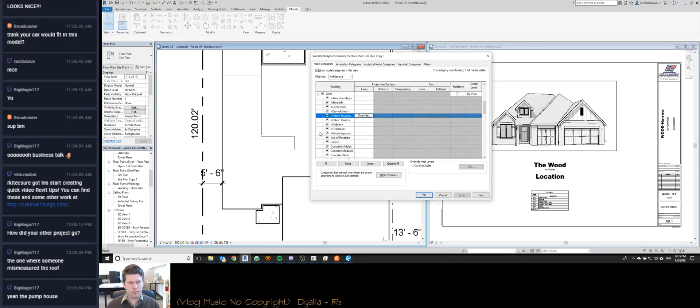Transparent concrete. Wow. Driveway. I think we'll just call it drive. Covered patio. Okay. And then let's just make sure.